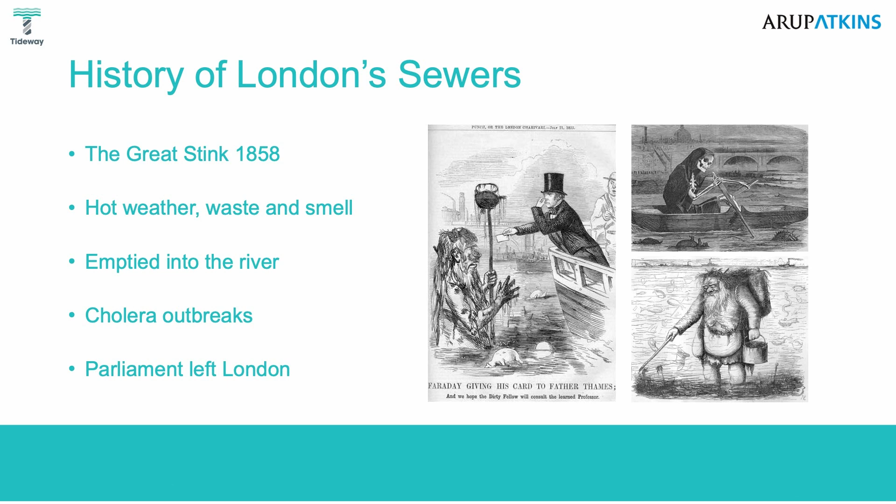This is... I've been talking through all this. There you go, big stink, hot weather. Also when it gets hot it smells even more. It's really gross. Outbreaks of cholera, Parliament left London, here's some images.

So this guy, Joseph Bazalgette, came along in 1868 and he said, enough's enough, let's sort this problem out. Finally, because it smelled so bad in Westminster, they decided that they would actually put some money towards it. And Joseph Bazalgette designed 100 miles of underground sewers.

Now this is Victorian ages, this was hand-dug, hand-built, 380 million bricks underneath our feet, hand-laid by people under the streets of London, which is totally incomprehensible. That would cost a lot of money nowadays.

So 1,100 miles of sewer in total are across London. Joseph Bazalgette's original solution was just 100 miles, just 100 miles.

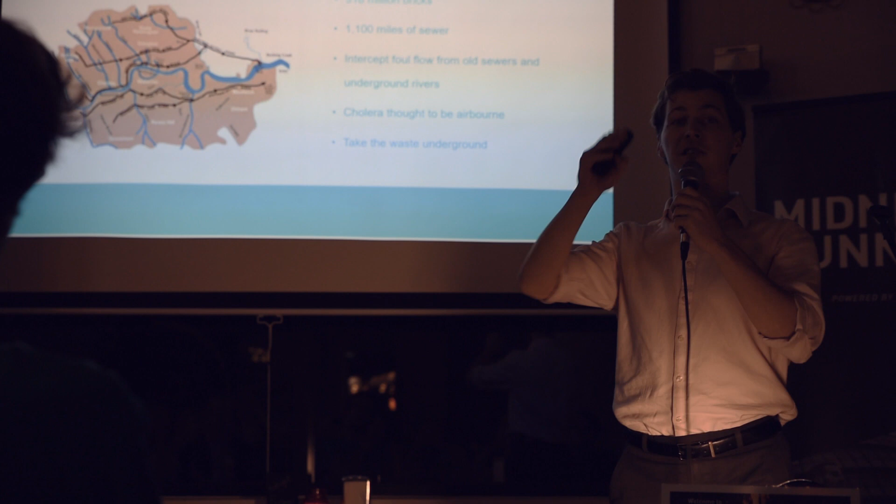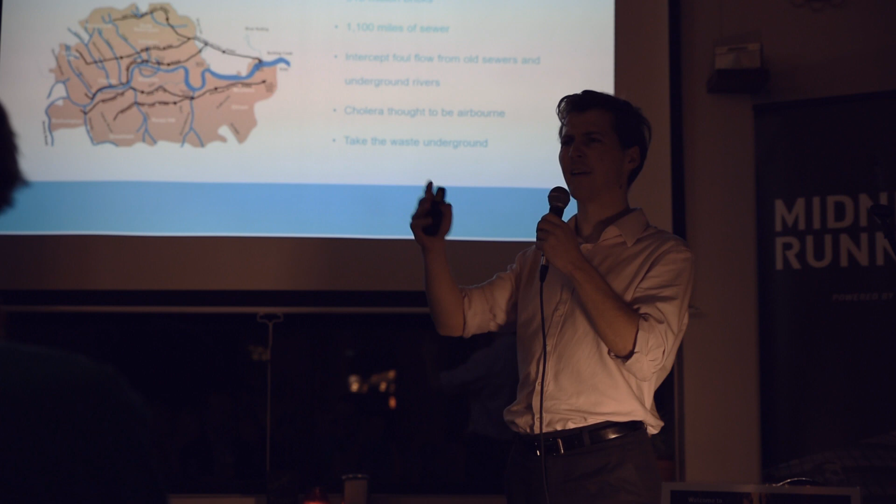It takes the waste underground and takes all of that sewage underneath all of the roads and rivers, intercepts all of the underground rivers that we've got in London, which there are many more of than you think. Fleet Street, for example, is above the river Fleet, and that used to be full of shit, so they covered it in a road, intercepted it, and now that runs straight into the Thames and it's full of crap.

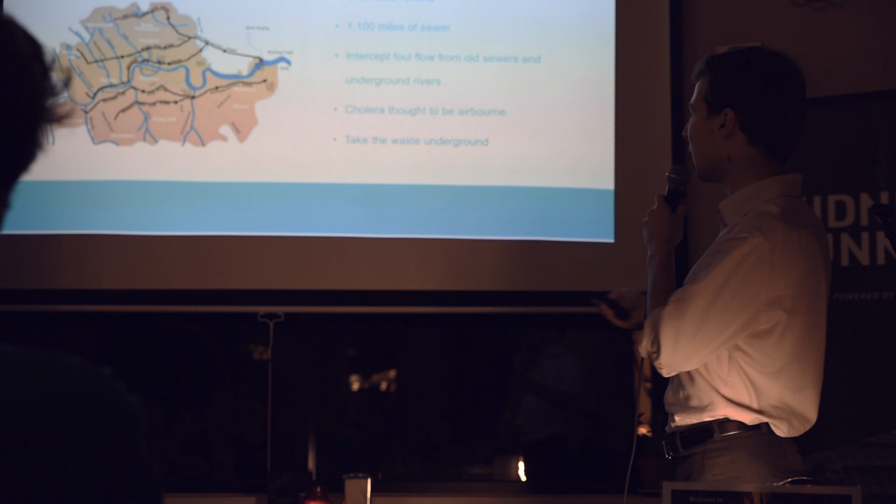So, at the time, 1868, the population of London was roughly 2 million people. Which is not many. And Joseph Bazalgette decided, you know what I'm going to do? I'm going to think forwards, I'm going to think ahead. London's going to grow, London's going to be popular. I'm going to go for 4 million people. I'm going to design this thing enough for 4 million people.

Obviously, we're about to hit 9 million. That's 150 years ago, we're still using the same system, but he built by hand all those years ago, which is a little ridiculous. We're about to hit 9 million by 2100, I think we're going to hit 15 million people.

So something needs to happen, because at the moment 4.2 billion toilets get flushed directly into the Thames every year. 4.2 billion toilets worth of shit in our Thames.

Have you ever looked along the side of the river closely? Don't, for a start. Secondly, in the industry we call it ragging. In reality, that's toilet paper and condoms. It's grim. Honestly, it's disgusting. Don't swim in it, you will die.

So all the way along the river, there's 21 different overflow points. Every time it rains, we've got what they call a combined sewer system, so we've got rainwater, stormwater and sewage water all in the same big pipes. Every time it really pours down, all of that water overflows, so 50 to 60 times a year, sewage fills up in the system and goes straight into our river at 21 different points along the river.

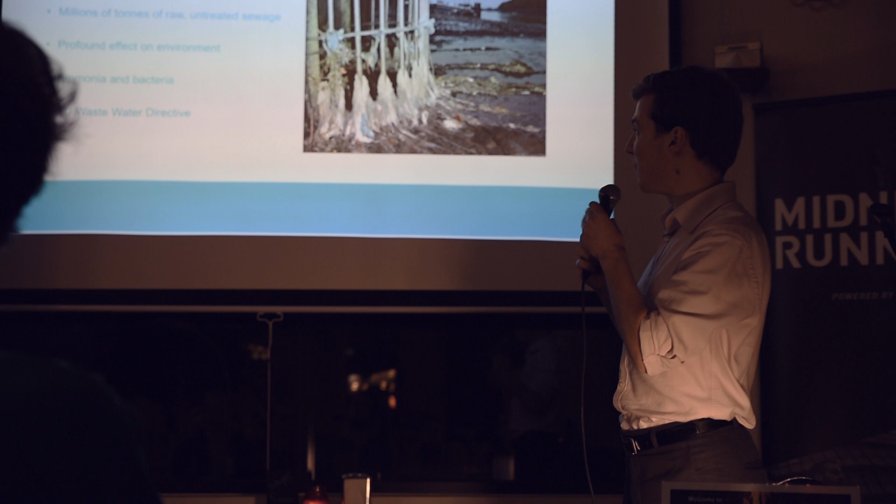Millions of tons of sewage, ammonia, bacteria. The EU, for now, has got a wastewater directive, and we're totally breaching it, we're breaking the law. We have to pay millions of pounds a year because the Thames is grim and it looks horrible. Nothing is done.

Population to reach 15 million by 2100. Of course, climate change, another big issue. The sea levels are rising, people are... I don't know. So we need a solution.

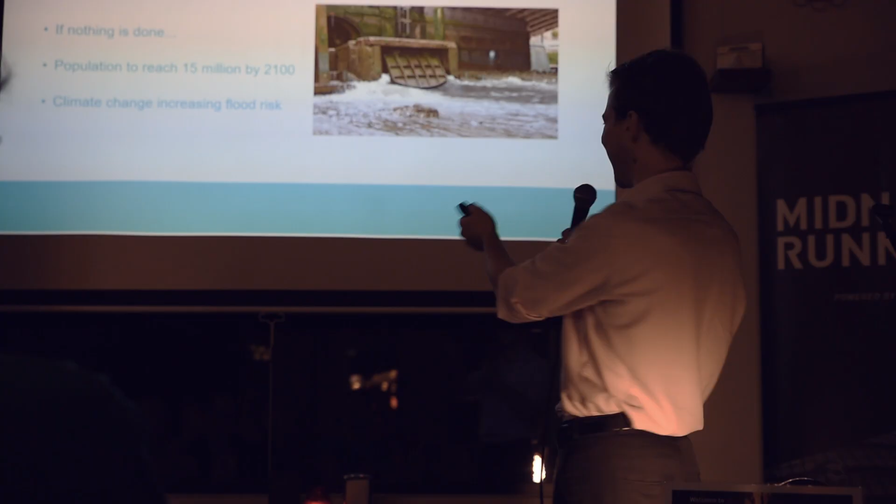So there's a lot of shit in the Thames, and the Thames is quite nice. It's the middle of our city, that's why we live here—well, that's why the city's here. So we need a solution.

A few years ago, they came up with Thames Tideway. Obviously the system as it is at the moment, this hand-built brick-laid sewer, is phenomenal. It's beautiful and it's fine, it's 150 years old, a few fatbergs in there, but other than that it's working great. To replace the whole system would have been billions and billions and billions, it would have totally ruined London, it would have been impossible.

So rather than doing that, what we decided to do was intercept all of those overflows. All 21 different sites where the original system overflows into the river—rather than intercepting the sewer, we intercept the overflows, so that whole system can work perfectly until it really pours down, and then we intercept all those overflows and take it elsewhere.

So what we designed is a 25-kilometre long interception tunnel, from Acton in the west all the way along up to Abbey Mills pumping station in the east. A lot of this route, actually, a lot of these sites you see on your rerun on Tuesday nights, and the other ones on Sundays I've seen you running along there.

I've never done a Sunday run. I should do it, I'm usually hungover.

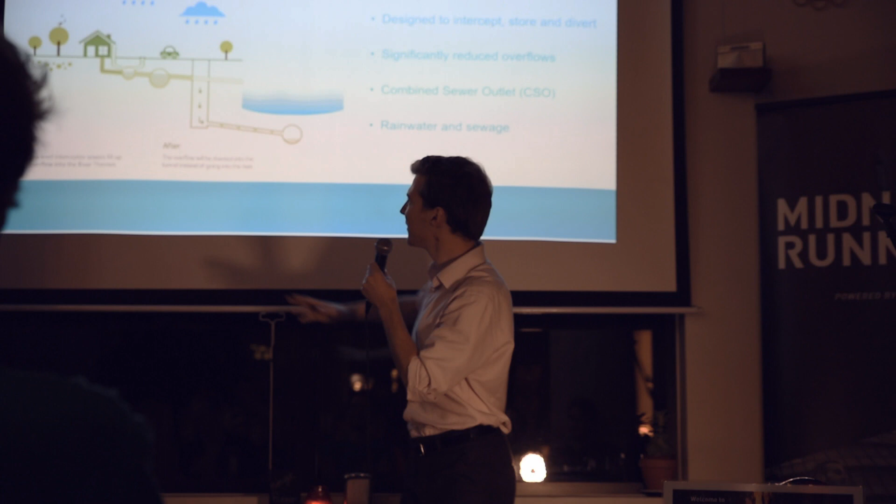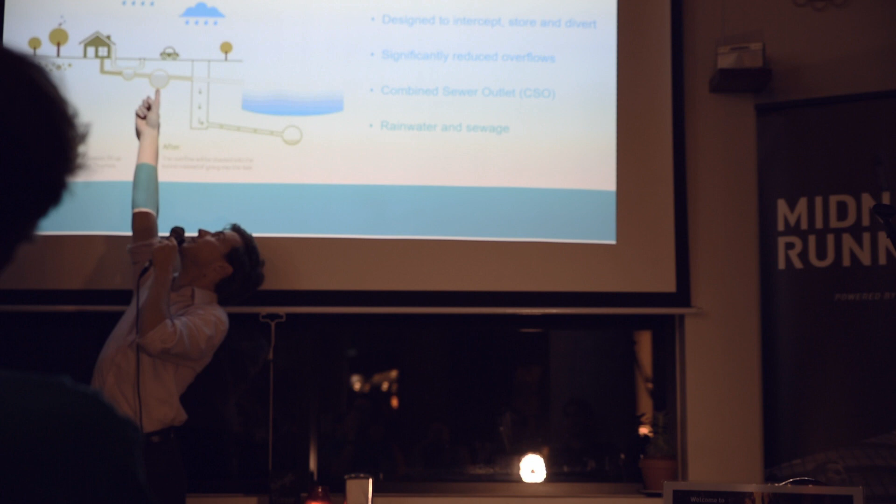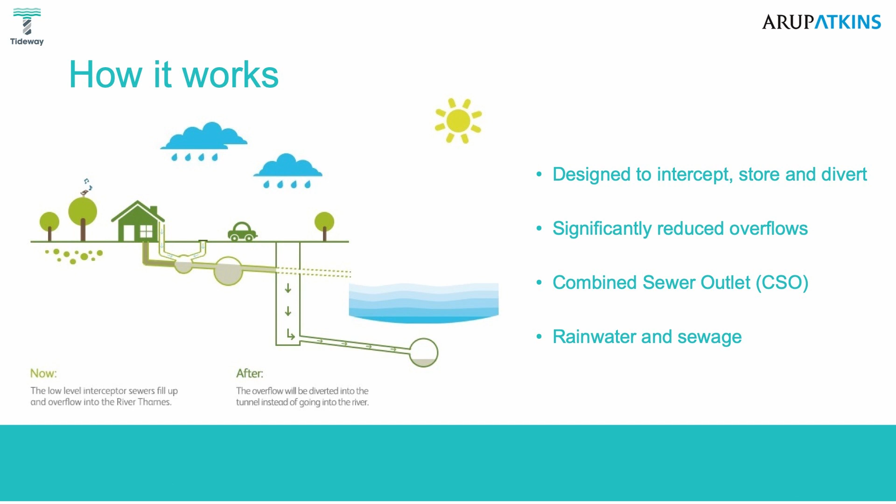So how does it work? As I said, we've got the original sewer system, which is this one here—this is where you shit, this is your house, this is the original sewer system, and this is the overflow going into the Thames, this big blue thing. So our job is intercepting this overflow into a big shaft down here, along and into the main 25-kilometre long Thames tunnel. Clever, right? That's the combined sewer overflow.

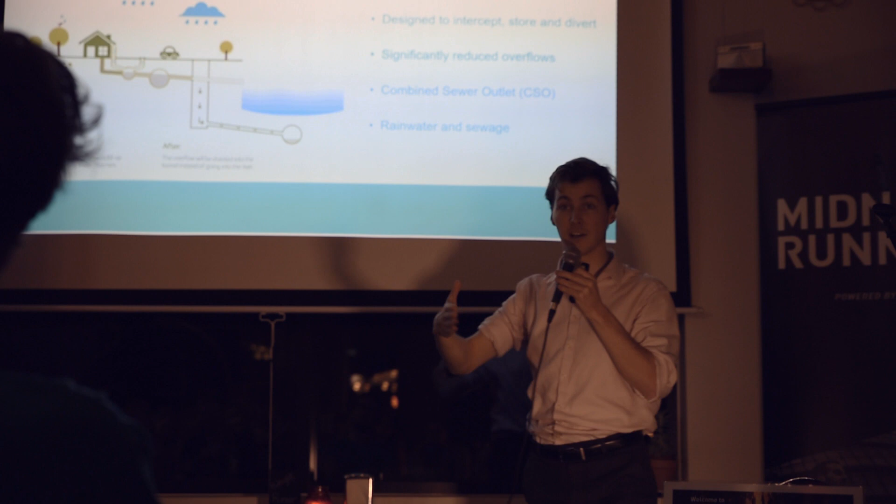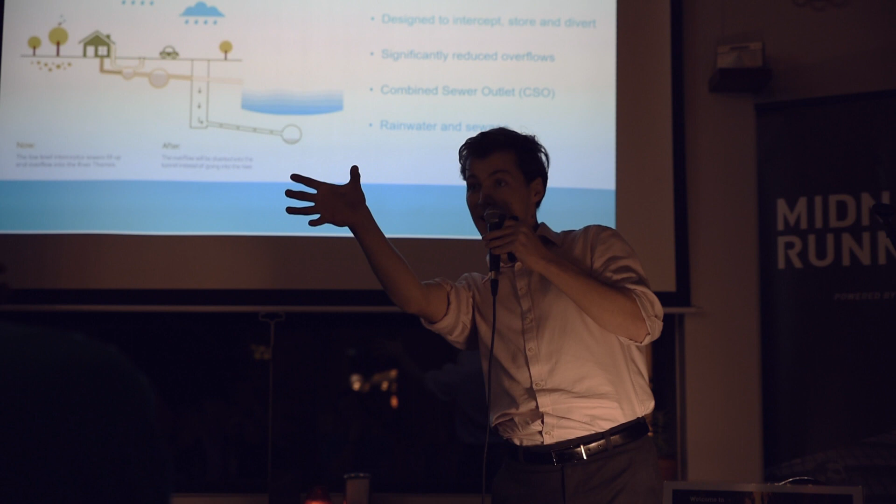So we intercept that, and it joins the main Tideway tunnel, which travels underneath the river, straight bang down the middle. At various points along the Thames, for example Tower Bridge has got those things you might have seen. Originally the Tideway tunnel was to one side, but they realised that as soon as you dig a tunnel 8.4 metres diameter slightly to one side, what you have is subsidence—one of the structures might slightly tip to one side, and all of a sudden those things are not going to close, they're just going to stop.

Which is really weird to think that if I did my job wrong, Tower Bridge wouldn't close properly—which kind of puts it in perspective in my head. I think that's really interesting. So we had to divert it into the centre of the river so that the subsidence of those two buildings was exactly the same, so that it wouldn't affect the Tower Bridge mechanism.

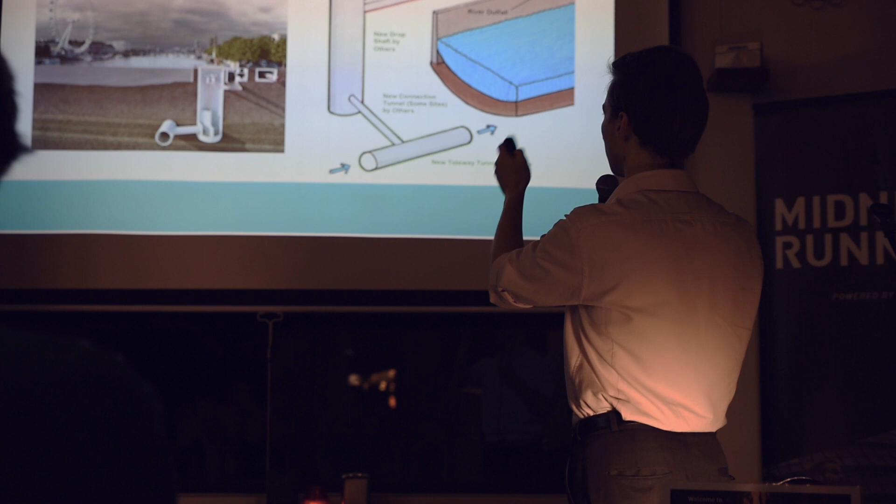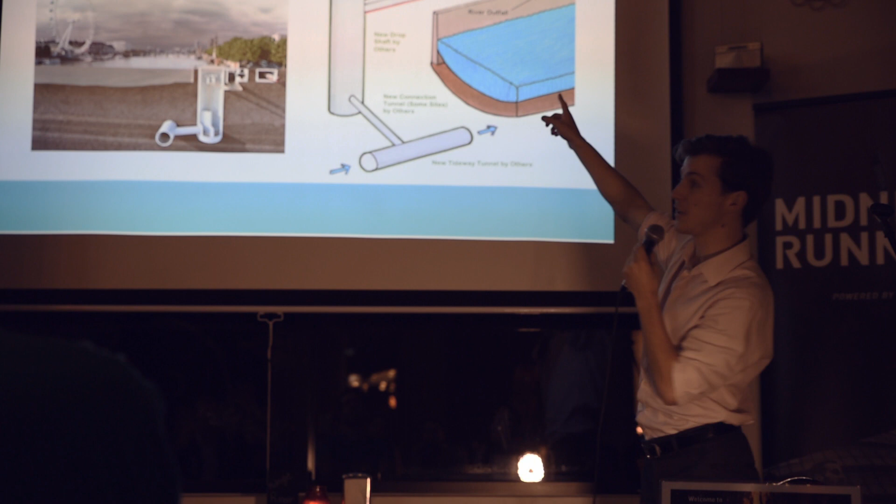Rainwater, sewage, how does it work? So this is a sketch I did. What we designed is that overflow, the grey one there—we intercept that overflow, so rather than going directly into the river, it goes down along that red pipe, down the main shaft in green, along and into this 25-kilometre long tunnel.

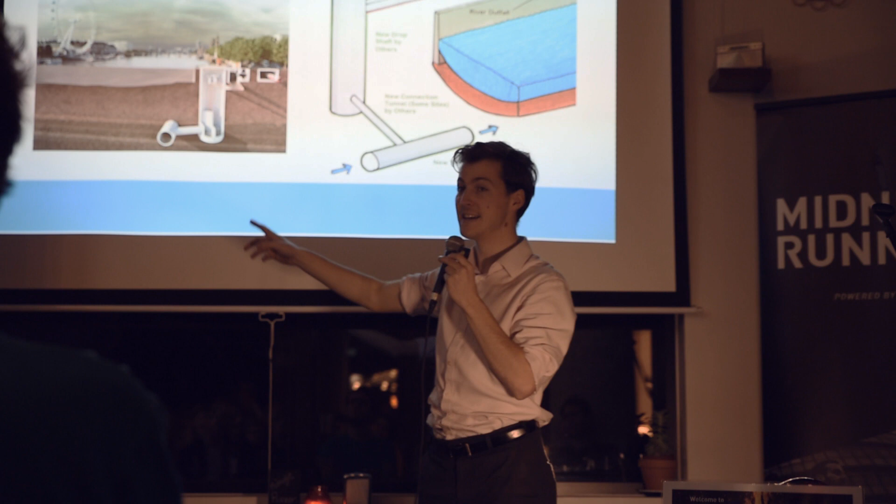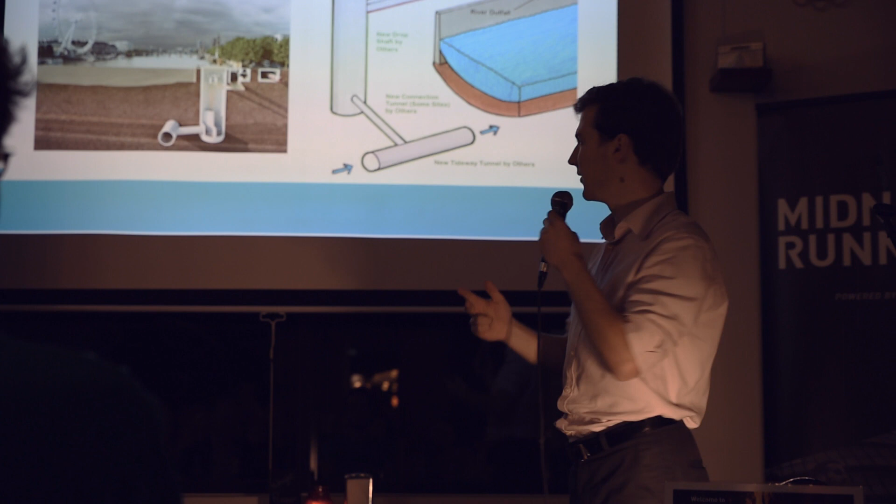Here's a snazzy image of exactly the same thing with the district line. Obviously London's got a load of stuff going on—all the tube lines, 11 different tube lines, all the buildings—we're going under buildings, under rivers, under tube stations, under all of these different things. So you can see here the original sewer system, which Joseph Bazalgette wonderfully designed, and then we intercept it, take it down this huge shaft and along into the main tunnel. Got it? Got it.

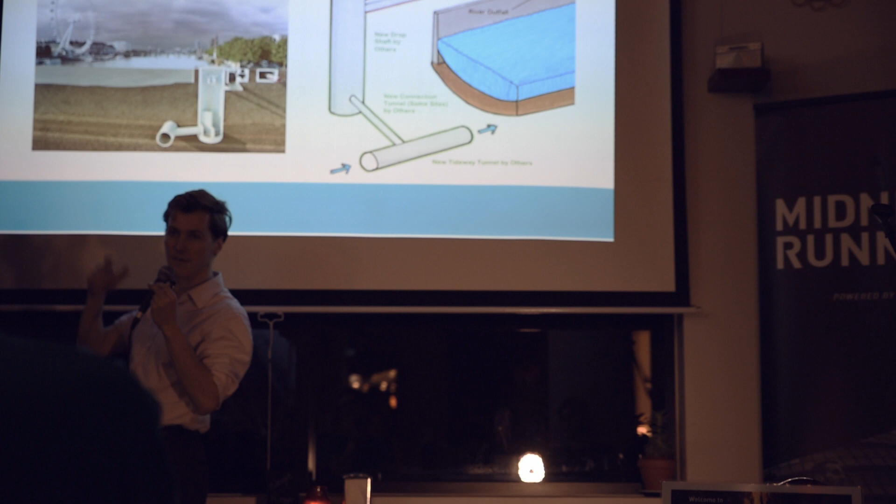So we have to dig a big tunnel. The package is split into various parts—there's the big main tunnel, and then there's the intersection bits. My job's the intersection bits. This is the big tunnel, it looks more impressive, so I'm sure I'll show you some slides of this.

8.4 metres diameter. To put that into perspective, roughly twice the height of this room, in a big circle.

I don't know, anyway. So this is the tunnel, these big things are called tunnel boring machines, TBMs. That there is just the head of the TBM, and that weighs 1,200 tons, that's 200 African elephants, that weighs alone. That's just the front of it, that's the drill bit. Behind that is a 200-meter long train that carries all of the parts that put the tunnel in place.

This is quite cool, and this is it being lowered down into the shaft. There's 6 of these across the whole of London. Interestingly, they're all named after female engineers. There's a tradition that every single one of the tunnel boring machines is christened. In the mining industry, all of the machines are christened a female name because it gives you good luck.

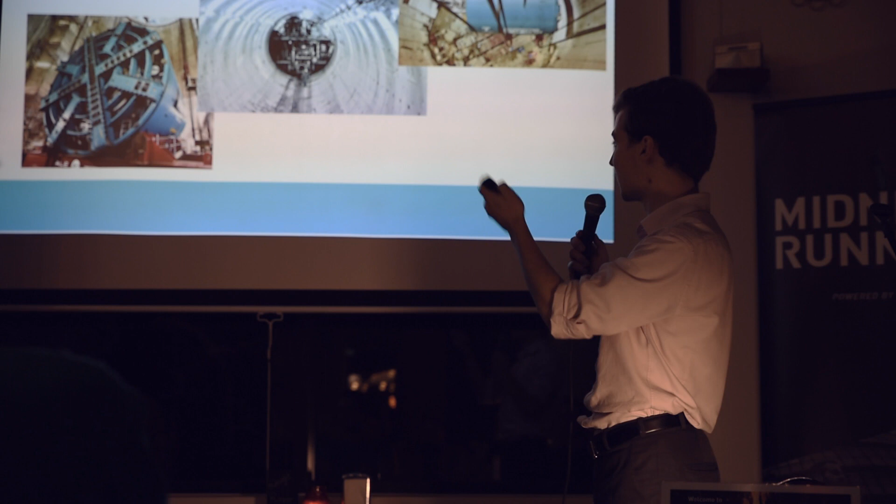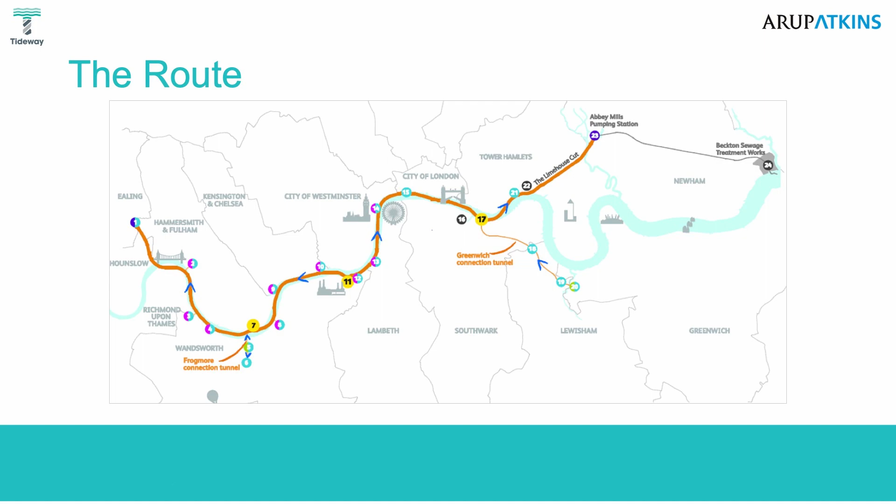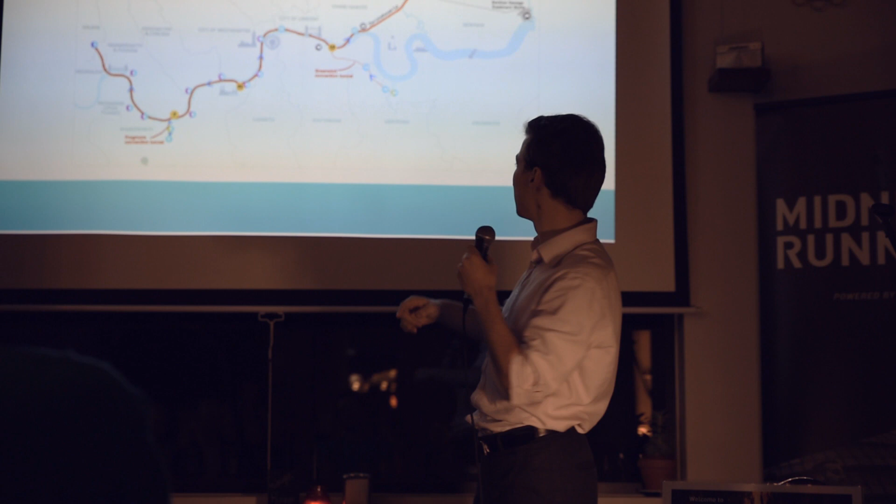This is the route. The route is split into 3, so there's 21 different sites, split into 3 from west to east. I work personally on the west section, so Wandsworth area, kind of along there, down to Acton, Hammersmith, Wandsworth, and then we switch at Wandsworth at Carnwath Road, and then the central section, which is definitely on the route. You'll have seen Chelsea Embankment is on there, Putney is nearby, and then into the east up there.

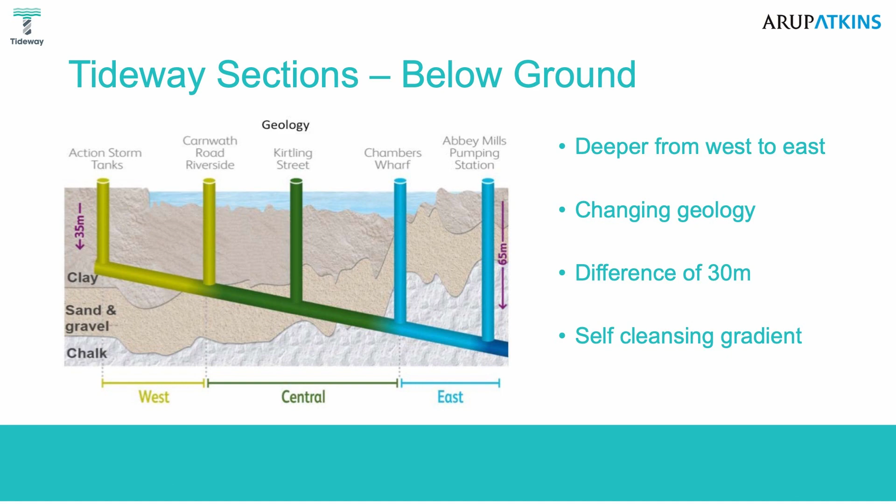Interestingly, it splits into 3. Obviously, you've got to get deeper and deeper and deeper. It's a self-cleansing gradient, so the difference between one end and the other is about 30 meters. That means the whole thing is traveling down the whole time, so it kind of cleans itself, so you don't have to go in there so often because it's full of shit.

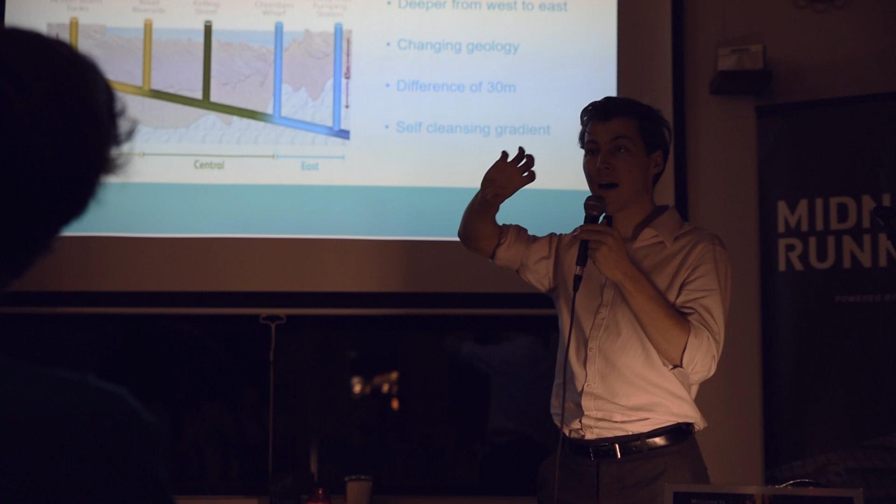So you start in the west, it's split by 3 different strata, so you start in the clay, go through the sand and gravel, end up in the chalk. For each of those different things, you've got to have a different cutter head that churns through the different strengths and weaknesses of rocks, which adds a bit of complication, but it's not my job, so they can do that.

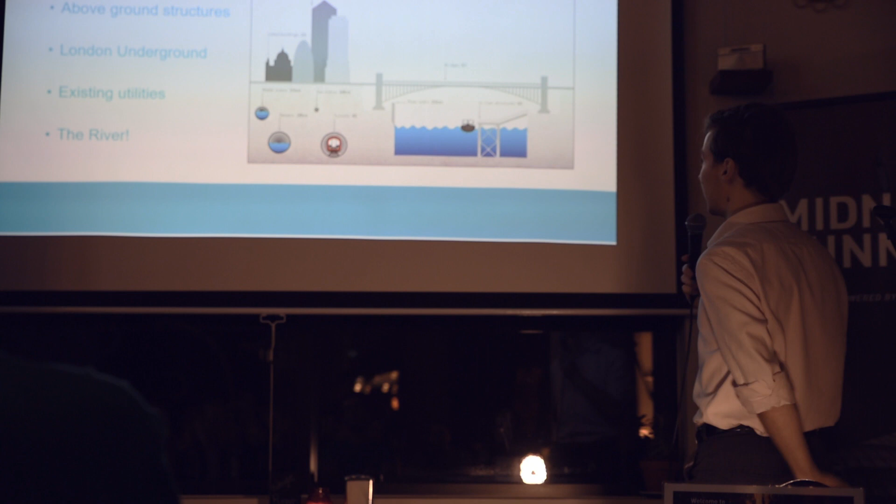There's the infrastructure, lots of buildings, lots of bridges, 1,300 buildings involved in this, tunnels, sewers, gas mains, water mains, all of this we've got to avoid.

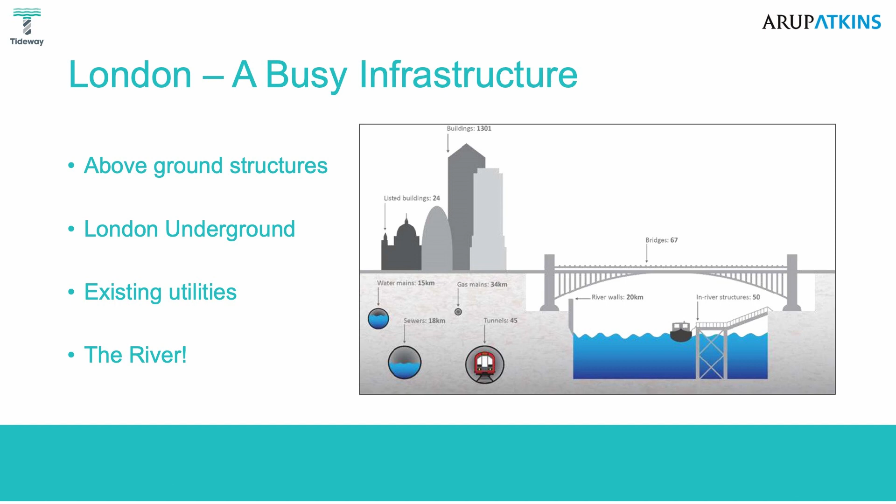One of the central sites is really interesting. It's just outside the head of MI5, MI6, the big green one, James Bond's one, you know what I mean. Thankfully not one of my sites, but they're building this kind of thing outside, but there's no dig zones, and the people in charge kind of go, look, you don't go near there. There are some cables there. If you cut that cable, I cannot tell you what will happen. We're talking big red button kind of stuff here. It's amazing, and actually, to design around what could be an atomic bomb button, it is a bit weird.

And they literally, we're not allowed to know, no one on the project knows. We just have a big zone marked in black saying, do not go there, because it's something to do with the government and bombs. There are also, interestingly, lots of bombs en route.

So you have a thing called unexploded ordnance. During World War II, there was a lot of bombs involved, and they dropped them out of planes, and some of them exploded and lots of them didn't. So as we're digging along, regularly we'll find unexploded UXOs, unexploded ordnance, in the clay, which haven't yet exploded. You nudge that thing, could blow up.

So every time we find one of them, which happens a lot, particularly in the central section, you've got to report it to the police. In theory, you need a 2-mile radius, which, considering the site is 1 mile wide, gets pretty sketchy. You'll see on the news every now and again the archaeological digs find these things, and it causes havoc, bombs.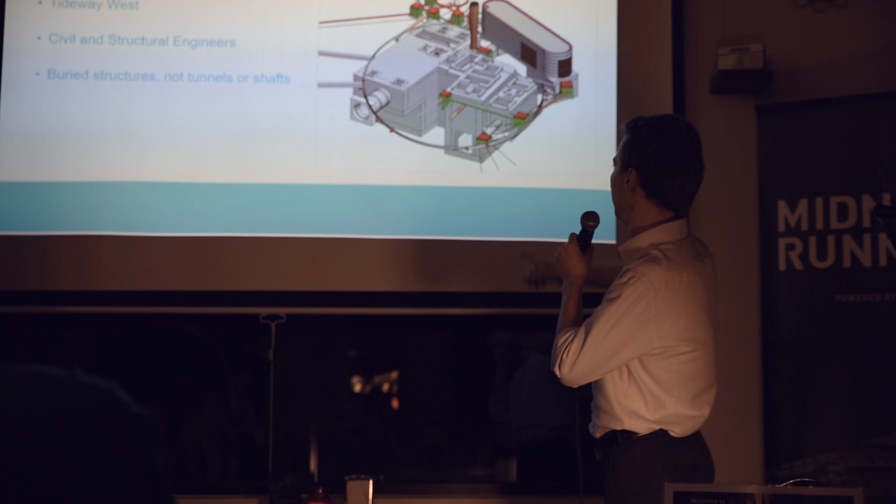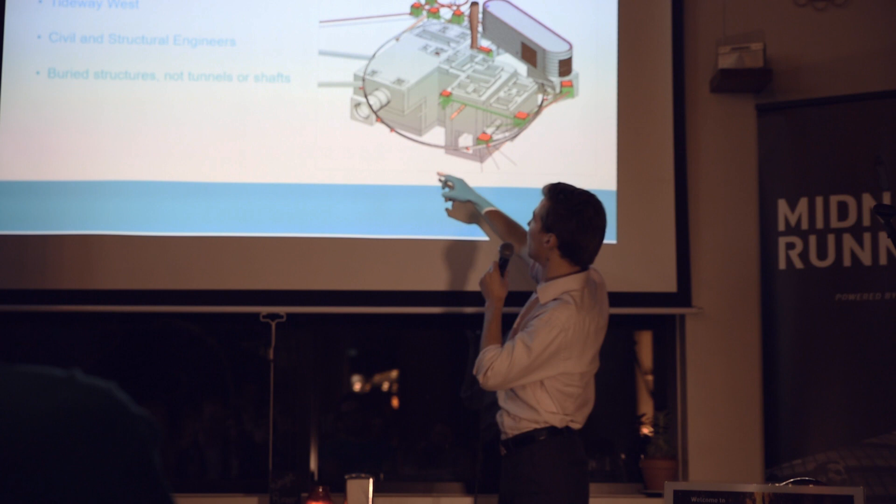So here's my 3D model, very proud of it, I won't bore you with it too long. This is the original overflow, travelling up there. So what happens here is the overflow gets intercepted around the corner, and through here there's various gates and that kind of thing to measure the flow of water, the strength of the water. If we need to stop it for any reason to do maintenance, we can block it all off.

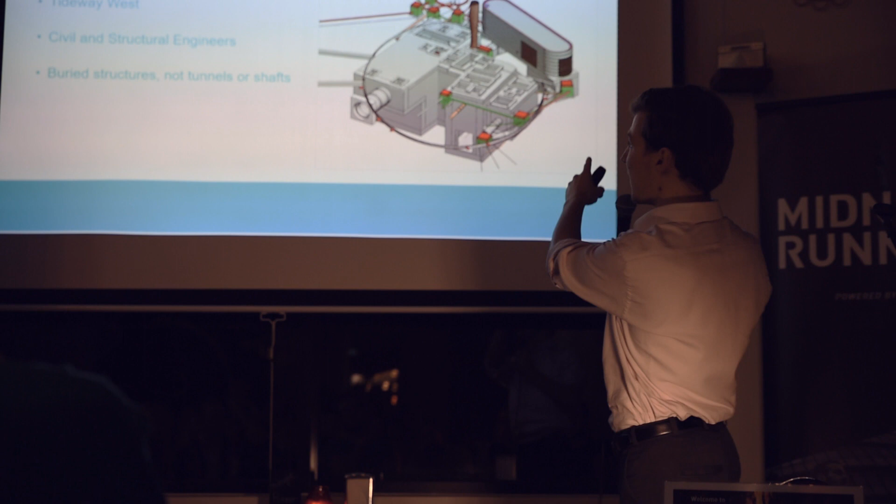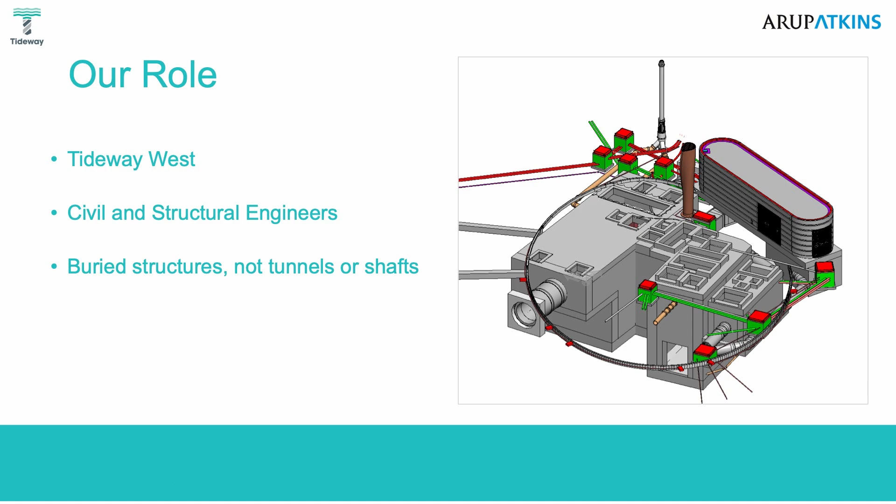So this is underneath King George's Park, which is Wandsworth area. You might have been near there. Sorry, that's all that digging is my fault. So this is kind of, again, probably roughly the size of this room, this chamber, 6, 7, 8 meters deep. Huge concrete walls, 1 meter thick, just to control all this water and make sure the whole thing doesn't fall in.

We've got all of these different sites - 7 in the west section, 21 in total. Every single one has to be completely different because we've got different sites, different intersection areas, different volumes of water. Hammersmith is enormous, it's already intercepting all this water.

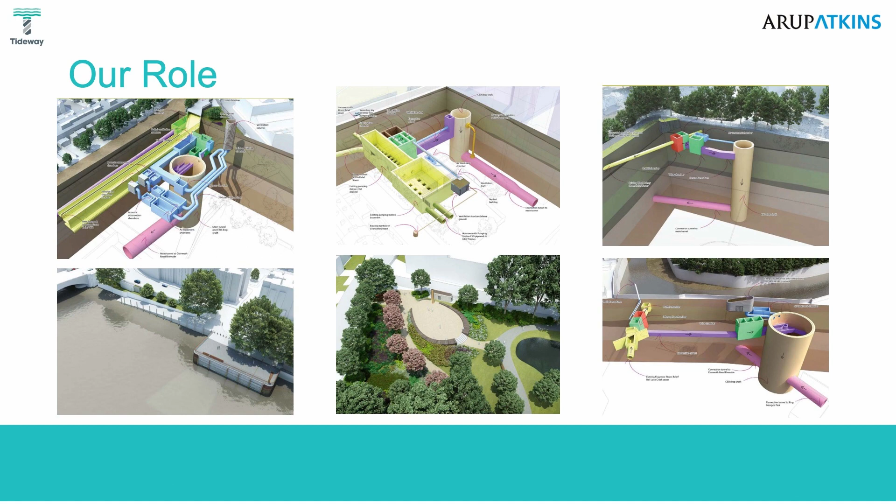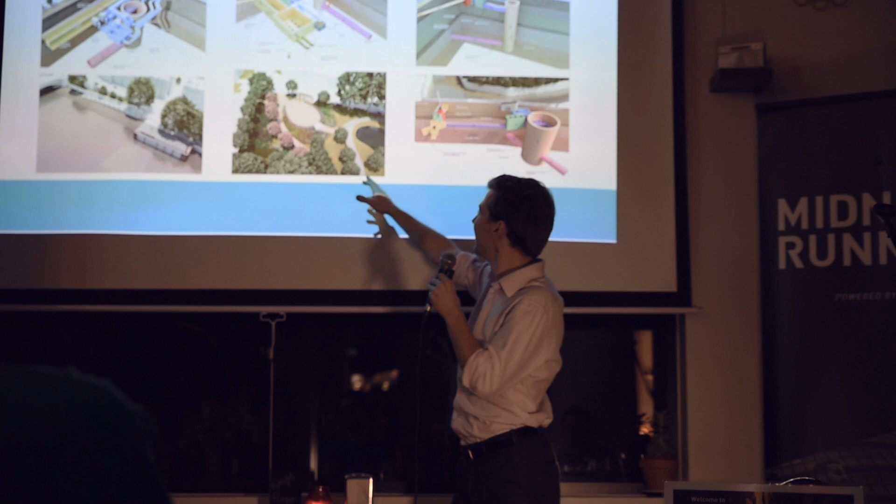King George's Park has lower flow. Some of them, like this one, Putney, they've had to build an embankment out into the Thames. So there's a few areas, Putney, Chelsea embankment, where we've built into the Thames, and it will look like a nice promenade area. And in fact, below you is 30 metres of shit. This one here is King George's Park. It's a very pretty park, and you can sit on these benches with shit beneath you.

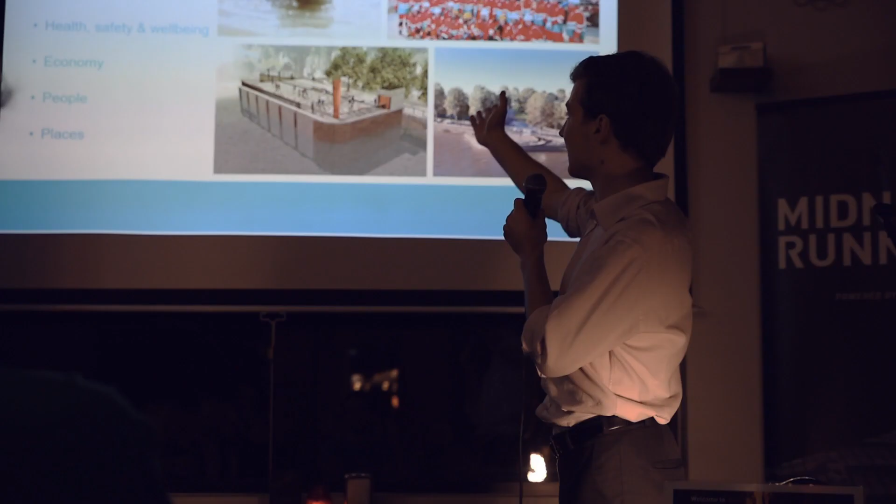There's basically 21 different sites in London where you can sit with shit beneath you. Good. The benefits - why do we need this? What's it for? Seals, the environment, people in hilarious high-vis jackets.

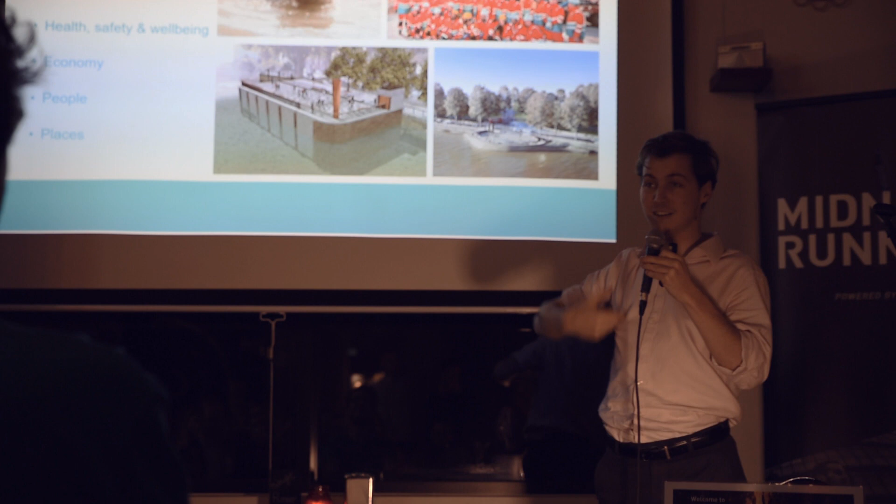Most of the companies on the project actually have made a loss, not because of the construction or any of our work, but because this fancy protection equipment that we're contracted to wear costs an absolute fortune. So we all have to wear this orange and green teal thing, which costs a fortune.

This is just outside the Chelsea Flower Show. This one will be really nice. But again, you'll know what happens beneath you.

Just to give you an idea, planning was approved in 2014. So we have a thing called a DCO, which is a development consent order. As part of that, you have to have lots of different parties - anyone affected on the route, any residential properties, commercial properties, people with interests, government, local councils.

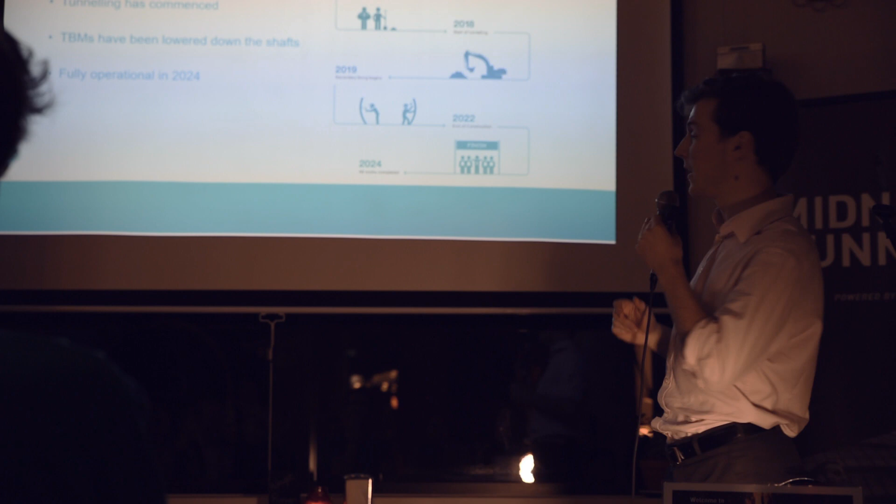I think we've got 18-something signatures on it. Every single one of them has to agree to every single one of the things that we do on the project, so it can be quite a slow burn. This has been around for a long time, but finally we got it approved in 2014. What year are we in now? 2019.

Secondary tunnel lining begins - that's when all the TBMs are now underground. They're all boring 24 hours a day, boring underneath our feet as we speak. All 8 of them are going at the moment.

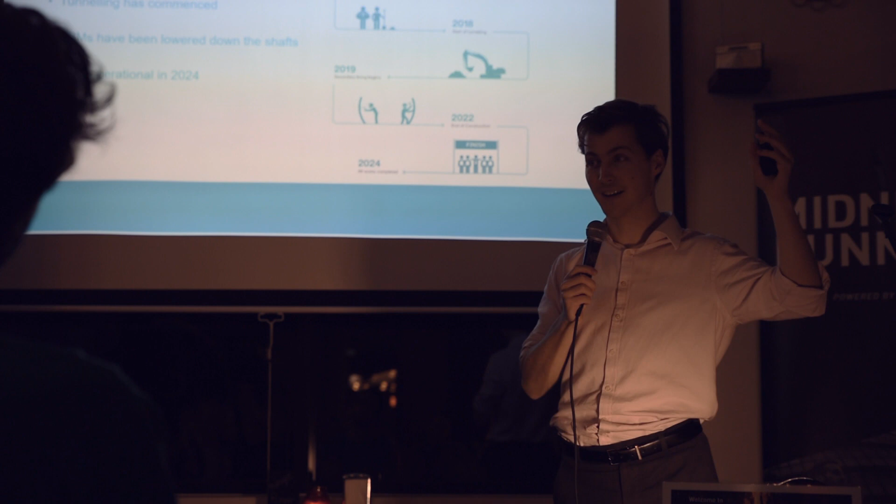As they go, they put in these concrete rings, and then you spray that with concrete to waterproof the whole thing. And then shit. 2022 we finished construction. Then there's 2 years of basically we fill the whole system with water, and then wait 2 years, and see how much water's left in it to see how many leaks there are.

Thank you for listening. That's Tideway. Yeah, so next time you take a shit, think of me, eh?

Luckily the company I work for, Atkins, has done a lot of work - I previously worked on Crossrail, so we've got all of where all that is. But basically before you work on any of these things, you do a lot of ground investigation. The short answer to your question is, how did we accidentally not bump into it? It's because we planned it and we knew where the Elizabeth line was.

There's a really interesting documentary on Crossrail, in my opinion really interesting, where they were burrowing within 10 centimetres of 2 different tube lines. So there's one crossing above the top, one crossing on the bottom, and the Elizabeth line, called the Eye of the Needle, has to go right in between. There's 10 centimetres above and 10 centimetres below, and the tubes in there are still running.

And there's people in there dressed in normal clothes, literally just checking that there's nothing going through the ceiling. Because London's got to work - the whole time that we're doing this, we can't close anything. So yes, lots of maps, lots of underground things. We do lots of tests to see what the soil types are. Lots of modelling and crossing fingers basically.

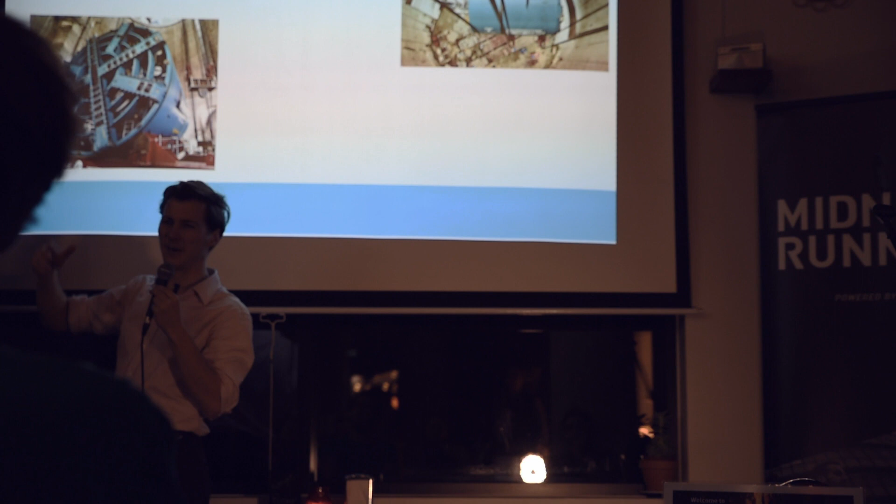Actually, maybe I'm going to change my answer. That was interesting, but more interesting is pigeons. This machine, this big thing here, was sat outside my office for 2 years, and basically they did it as a bit of a publicity stunt to be like, oh, we're making loads of progress, we've built the tunnel boring machine, we're ready to go underground with it. They had to cover it in netting, because if a pigeon roosted in there - it's nice and cosy in there - it is very, very illegal to move a roosting pigeon. So the whole £5.2 billion Tideway would have been delayed for one roosting pigeon. So they cover the whole thing in netting. I think in reality somebody would have gone late at night and kicked them out. But weirdly, it's actually the tiny little things - newts and bats and pigeons - that are much more difficult to deal with than World War II undetonated bombs or MI5. That's quite tricky, but pigeons, really, honestly, up there.

I'll answer that in two parts. So it travels from the west in Acton all the way to the east in Abbey Mills pumping station. Abbey Mills pumping station pumps it 85 metres up back to the surface to Beckton Sewage Treatment Works, which is Europe's largest sewage treatment works, and treats it. So it goes back into the system, goes into drinking water. Interestingly, it's got 27 times more requirements than bottled water - tap water is better for you than bottled water, so stop buying bottled water. The whole system is 25 kilometres long of storage as well, so when it rains, that fills up and fills up, and then when Beckton can manage, it pumps it up and deals with it.